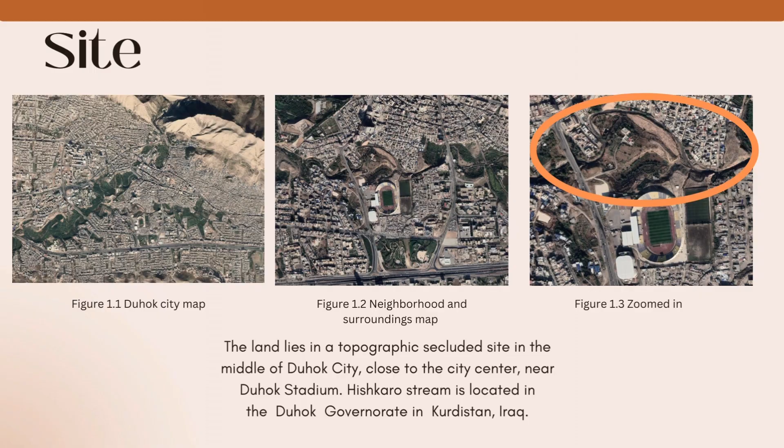Current situation: the stream at Point B is surrounded by closely packed residential buildings and houses on one side, while the other side is bordered by a topographic hill containing a private residential property. The stream is not used for any particular function at the moment, as the water level is low at this point. Thus, the riverbank is polluted with residential waste.

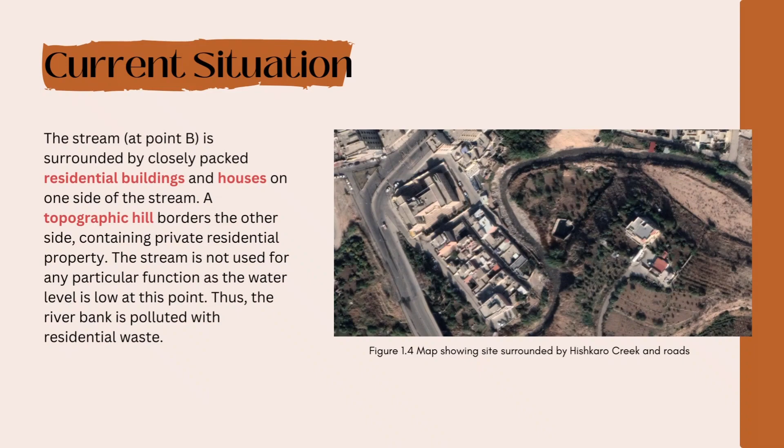Current situation, problems: as seen in the multiple pictures provided, the creek's water levels are low, and the sewerage system that moves water from the street and houses is clogged with waste from the nearby residential buildings. The creek is not contained within a safe structure, and it's instead open to the public, which is a safety hazard.

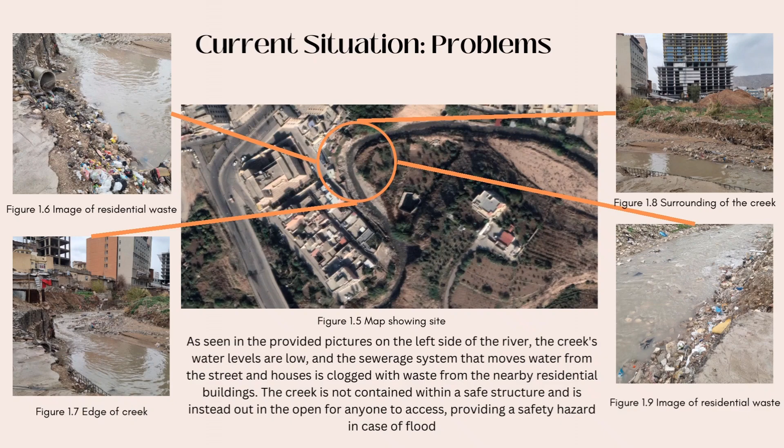For the multiple drawings provided, we have sketched sections of Point B of the Hishkaro River. As you can see from the pictures, one side of the hill is higher than the other.

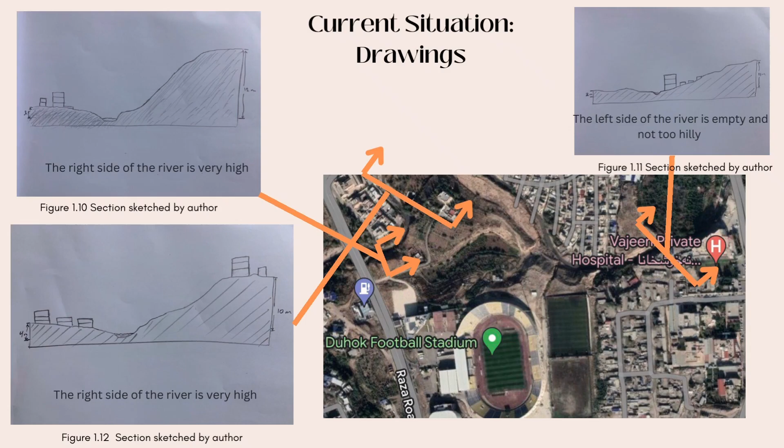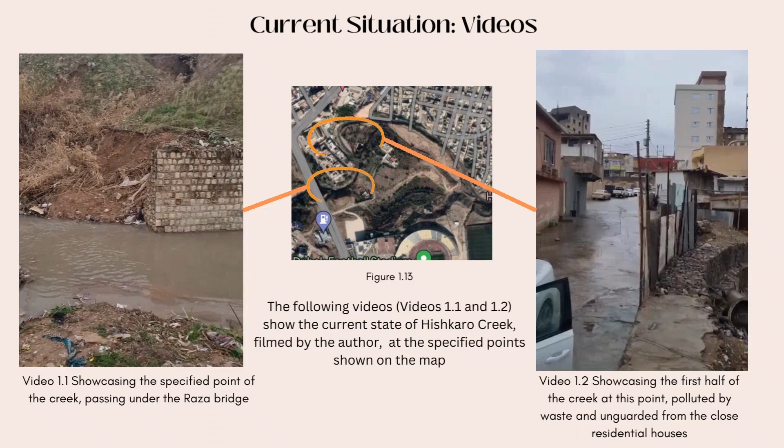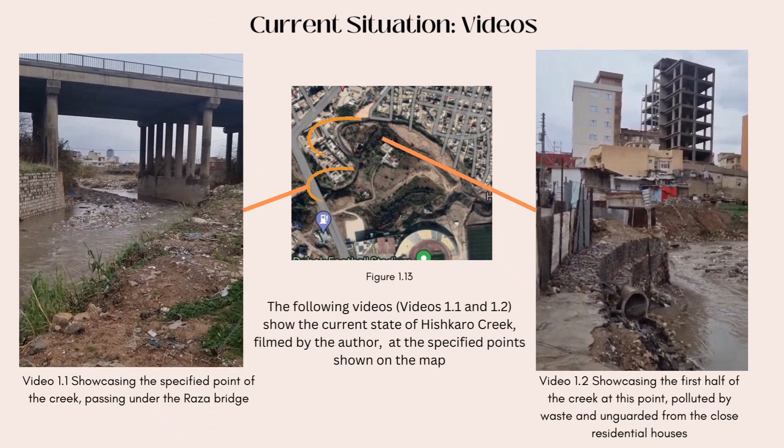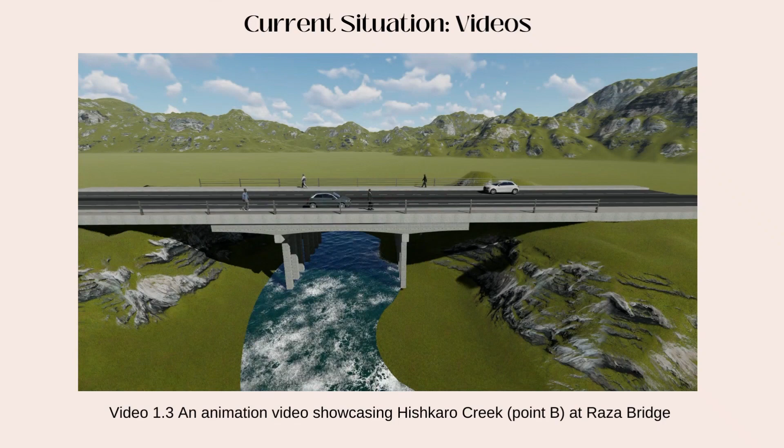As seen in the videos provided, on one side of the river, the water passes under Raza Bridge, which is the first video. The second video shows the riverbank very close to the houses. Here's an animated video showcasing Hishkaro River passing under Raza Bridge.

The land use: due to the nature of the site location, the area is secluded and private, lying behind a single private territory that is used as a residential area. Thus, it limits the type of activities done on the site itself, but includes the surrounding activities and nearby uses.

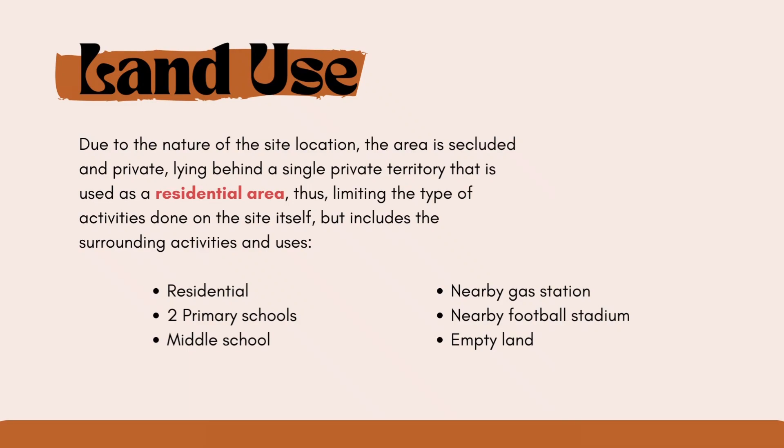Accessibility: the site can be accessed through Raza Road, which extends from Azadi Park to Duhok Bazaar. The site is also accessed through 2 alleys, which are narrow and small, Shashan Alley and Shahla Alley, both of which run through the small neighborhood of the site.

The creek at this point runs under Raza Bridge and extends all the way to Silav Road.

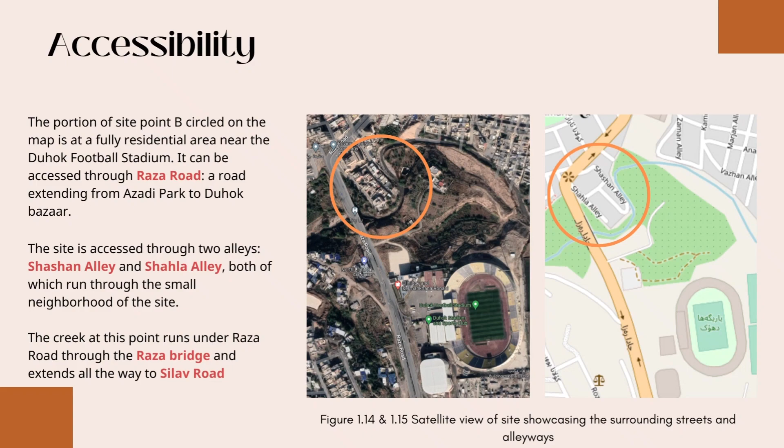For the noise, the area houses 2 elementary schools, very close to the residents, which could be the biggest noise source. But despite that, the area is quiet, not containing any other major noise source.

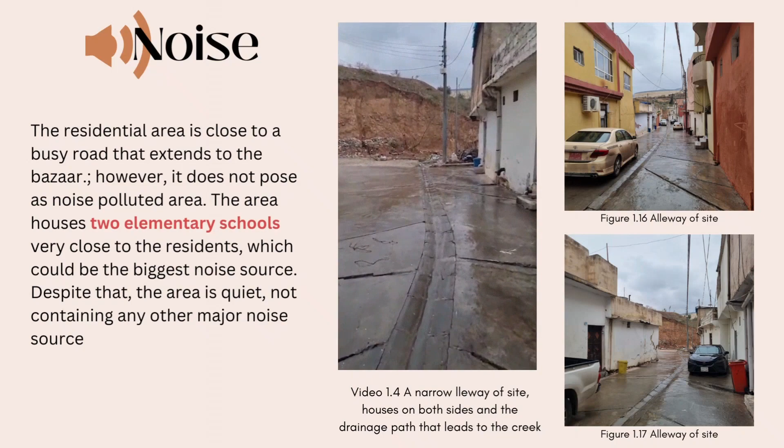Current activities: the site of the creek currently does not have any activities catering to the public. The nearby street and residential alleys use it as a sewerage system to clear out excess rainwater. Thus, the current activities of the site are: the creek is used as a sewerage system, as seen in the first picture, and some residents have small garden plots surrounding the creek.

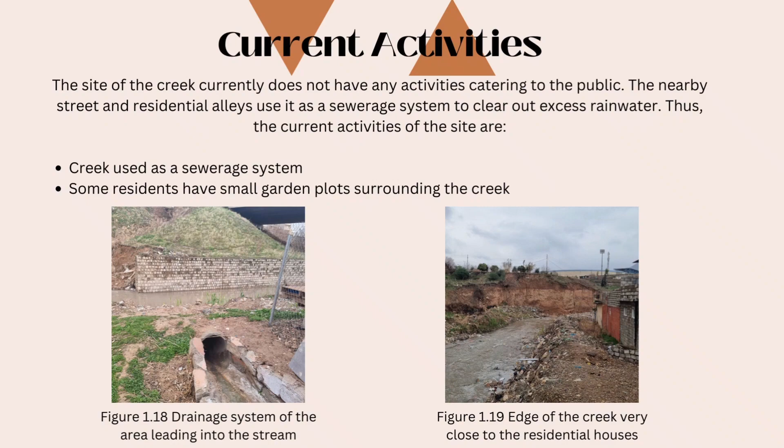Due to the risks, the creek, left unsupervised with little to no maintenance, becomes a very hazardous site. There are 5 major hazards that we must talk about. The first one is the one concerning residential waste, which makes a health hazard.

The second one is the lack of safety guarding, which is a physical hazard. The third one: no rainwater management, and causes a lot of flooding, like the ones that we've talked about, which is a safety hazard.

The fourth one: no waste water or chemical waste control. This leads to the uncontrollable spread of diseases and foul-smelling odor in the summer, which is a health hazard. The last one: the floods and high water levels cause erosion to the structures and buildings on the site, which is a safety hazard to the residents nearby.

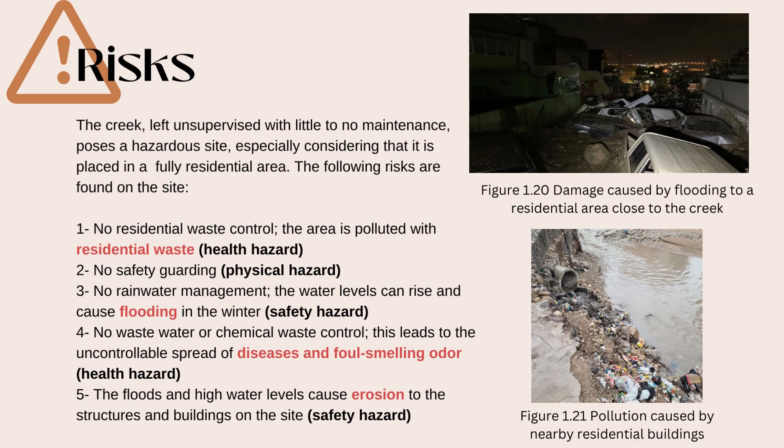There are multiple floods that happened over the years, but we wanted to mention two of the most recent ones. The first one happened in 2018, and the second one happened in 2020. As you can see, it caused a lot of economic damage, and in some cases, it caused fatalities.

People's opinion: the people living near the Hishkaro River have multiple concerns. The most prominent ones are that they're concerned the municipality will not solve the problems of the creek within an efficient frame of time. The second is that they're concerned they won't be compensated for the economic damage the floods have caused them over the years. The third is that they're concerned the projects and proposals presented to the municipality will keep on getting rejected.

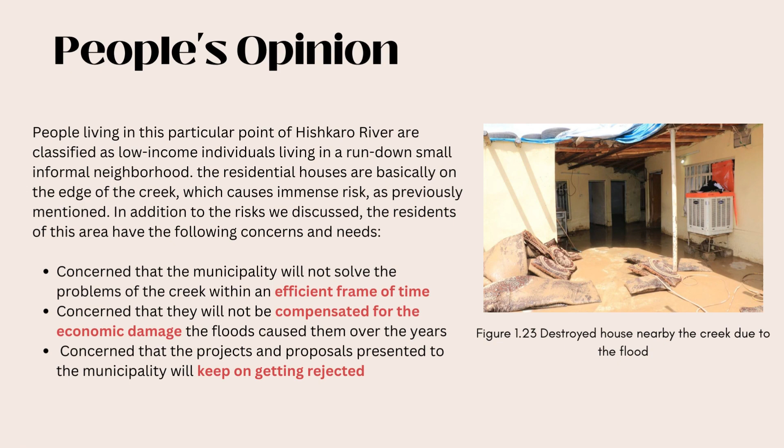These are a few designs proposed to the directory. The first is composed of cantilever walls on both sides of the riverbed. The second is covered in cladding stone in a double trapezoid shape. The third is composed of a cantilever retaining wall on the right side and cladding stone on the left. The fourth is the opposite: retaining wall on the left side and cladding stone on the right side.

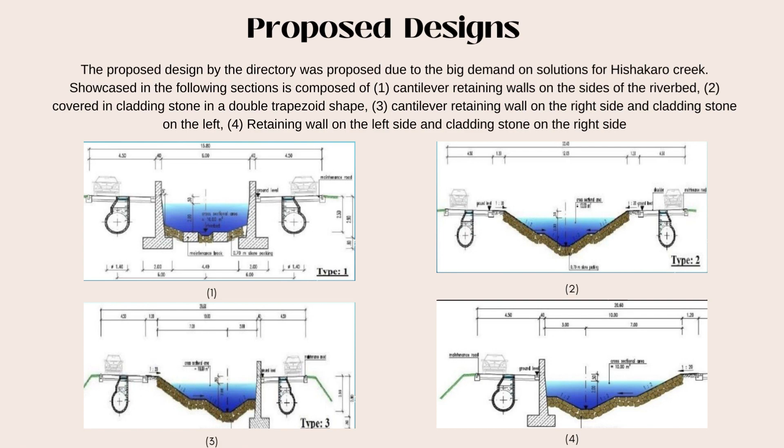We assume that for our point of the river, design number 4 would be the most efficient because our site has a topographic hill and a low residential area on both sides of the river. So on the high topographic hill, we can have stone cladding, and on the other side, near the residential area, we can have a retaining wall to prevent flooding.

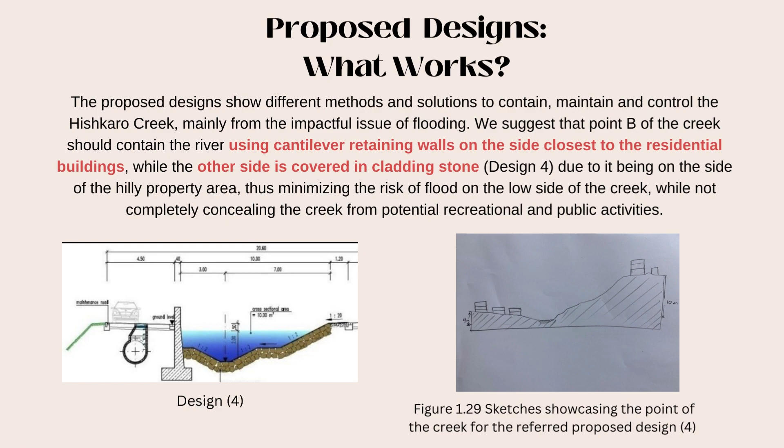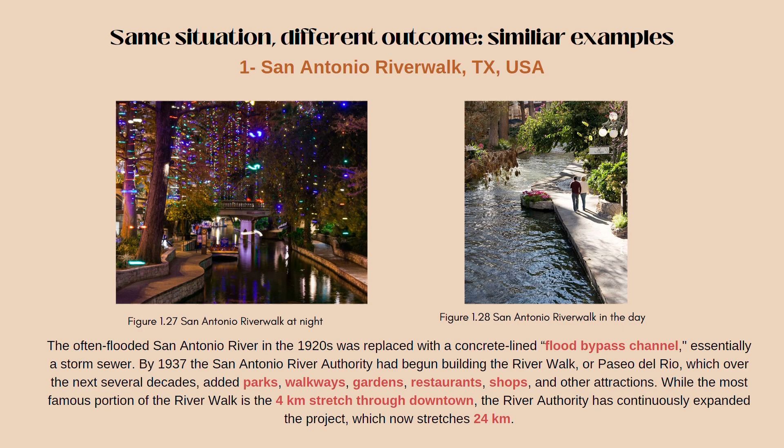I'm going to talk about two international examples that have the same situation and reach different outcomes. First, we have San Antonio River Walk in USA. The authority of San Antonio River added parks, walkways, gardens, restaurants, shops, and other attractions to the river. The most famous portion is the 4-kilometer stretch through downtown. It was expanded later and now stretches 24 kilometers.

The second example is Kallang River in Singapore. The aim was to create vibrant community gathering spaces while accommodating the drainage functions of the river at the same time.